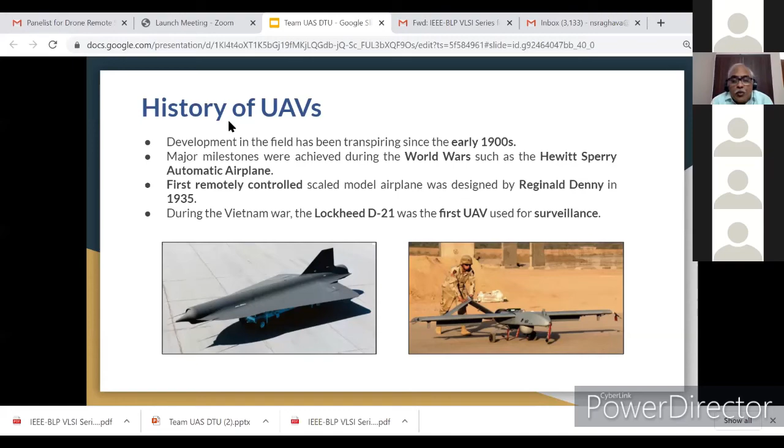Now, when I come to the overview, you know that the history of UAV field development in this field has been transpiring from the early 1900s, and major milestones were achieved during the World War, such as the Hewitt Sperry automatic aeroplane, and the first remotely controlled scaled model aeroplane was designed by Reginald Denny in 1935, and after that, in the Vietnam War, Lockheed started the D-21 with its first UAV for surveillance.

This is the evolution and revolution of the commercial or military and humanitarian use of drones. Initially, the drones were used only for military origins, and after that they were developed for humanitarian uses, which has been converted into commercial usage. So it shows the timeline of all the drones, how it has been evolved as well as revolutionized for different works.

Types of drones started with a single rotor, much like helicopters, with a large rotor along with a small one at its tail. This has been used as a single motor, and it is more efficient as compared to the multi-rotors.

Similarly, bicopters have been used as the second choice. They have two rotors, two motors and propellers, which are very cheap and offer a longer endurance. Flight control is complicated, but current results are largely experimental.

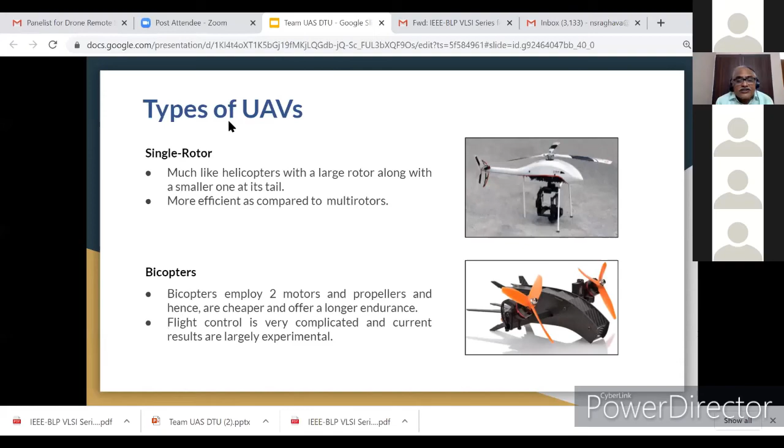The third one was tricopters. This is cheaper than the quadcopter, and has better endurance, but stability is reduced and the flight is jittery. So this jitteriness affects the stability of the film or video you are going to take, which is not that good.

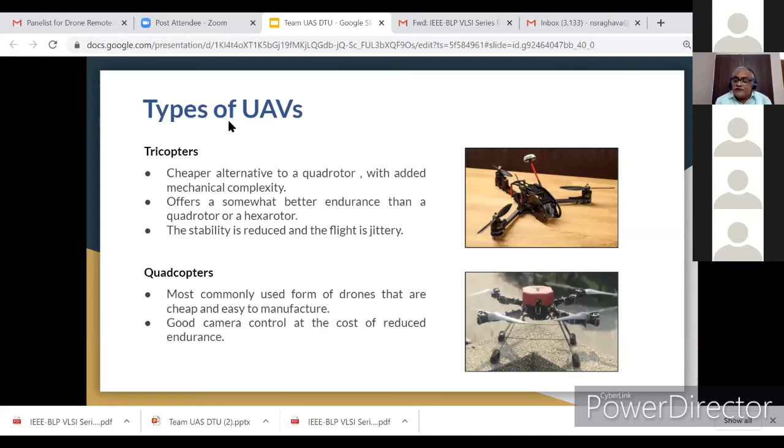Then they developed what is known as quadcopters. In quadcopters, mostly they used forms of drones which are cheap and easy to manufacture. Good camera control at the cost of reduced endurance has been achieved in this type of quadcopter.

Then hexacopters have come, offering a more stable flight with backup motors in case of motor failure in an arm. They generally reach greater altitudes and maintain control over their flight in windy conditions.

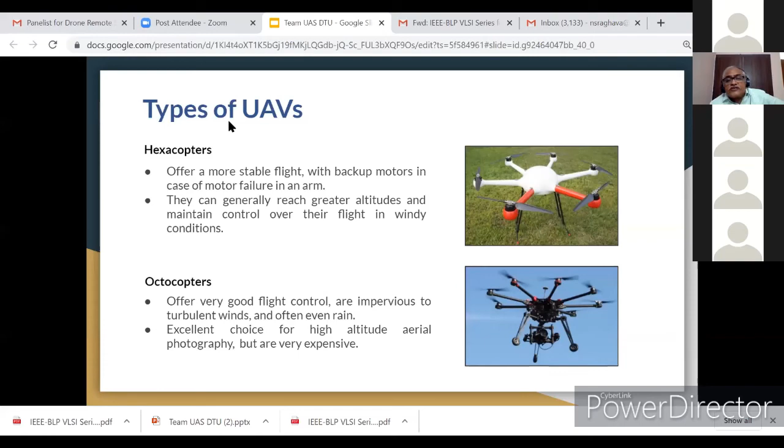Then came the octocopters with full good flight control, impervious to turbulent winds and often even rain. An excellent choice for high altitude aerial photography, but they are very expensive.

Then came the fixed wing. Fixed wings are just like conventional aeroplanes, having a wing structure, high speed and endurance, but they don't have hover capabilities and have low maneuverability.

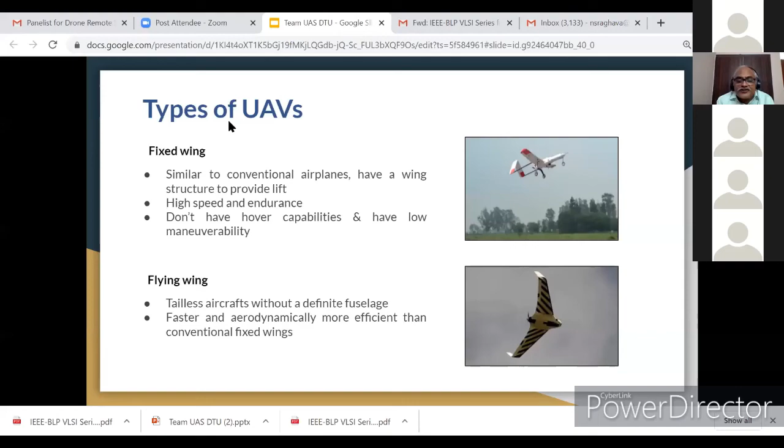Flying wings have also been developed. These are tailless aircraft without a definite fuselage, and are faster and aerodynamically more efficient than conventional fixed wings.

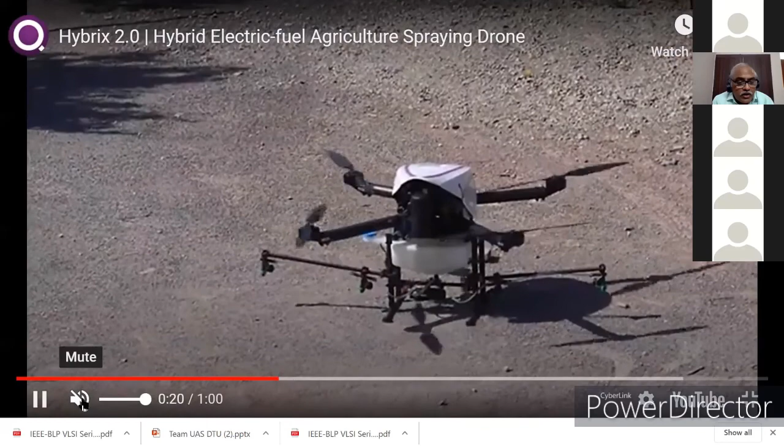In the video the volume is off. I'm not able to understand. Achha, okay, yes, is the sound there? No.

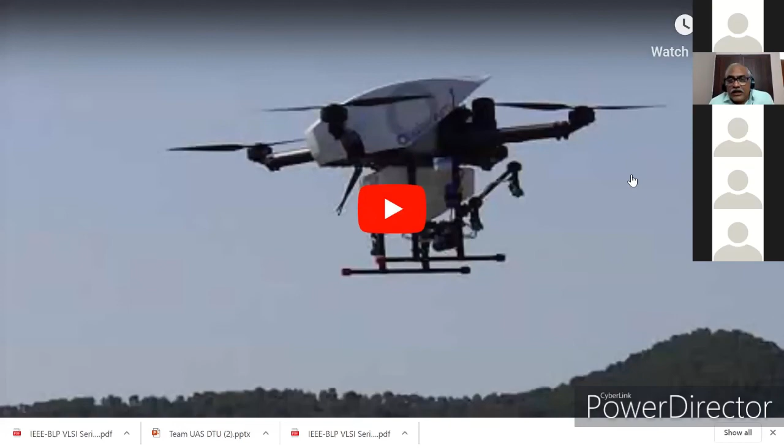So this shows how you can spray the pesticides on the crops. So this we can use it. I will show you certain things afterwards, which I have worked along with Dr. Sahu.

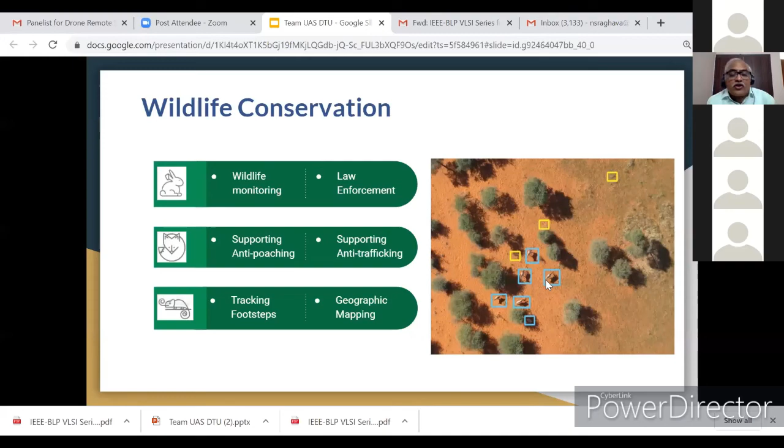And this is for wildlife conservation. We can identify the people where they are working and how they are working. Any other thing which you can identify about the concentration of the people and disaster management. We can identify the concentration of the people and drop the payload.

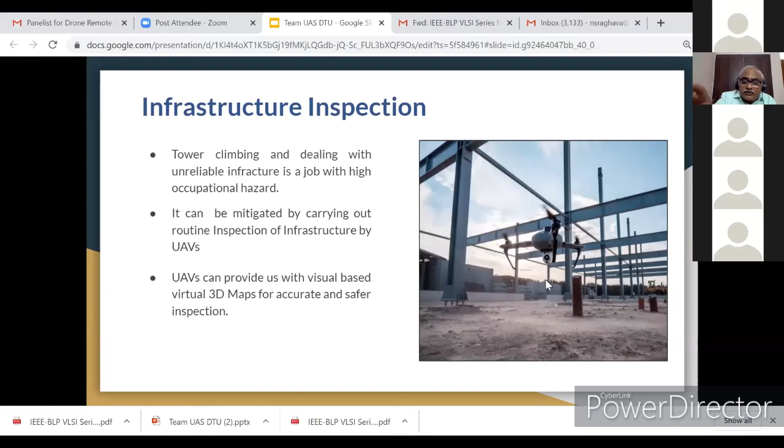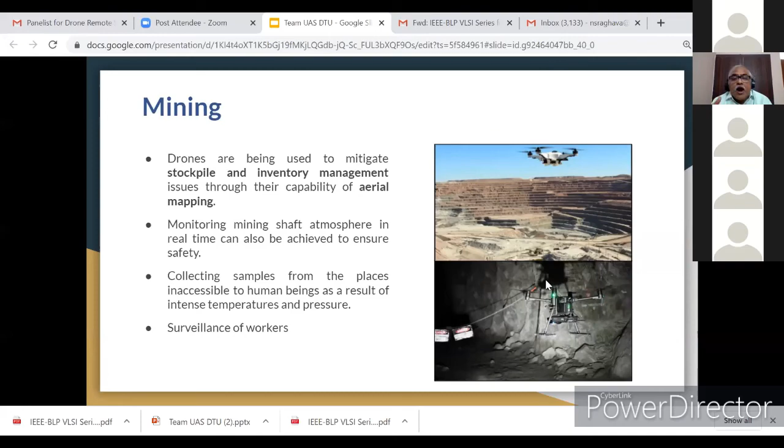And infrastructure inspection, while constructing, we can send drones like this, and we can see how exactly the situation of working can be identified. Like in mining also, you can send drones for stockpile and inventory management or aerial mapping capability and the working condition of the workers. All these things can be identified for use in mining.

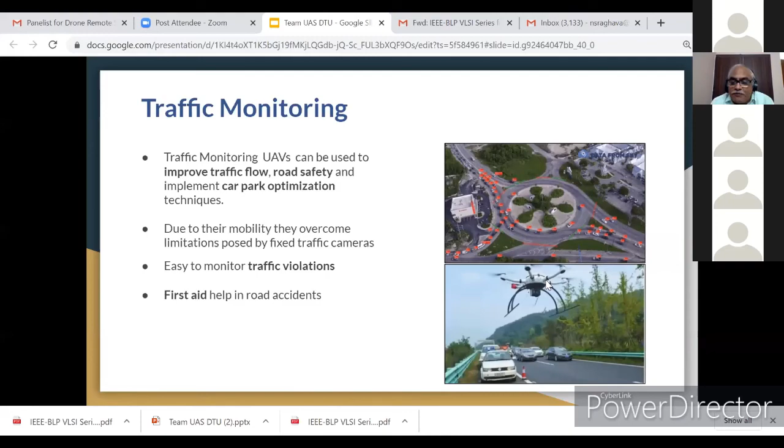This is traffic monitoring, how the movement of traffic is there, whether they are violating traffic rules, or first aid help can be made, etc. And this is signal strength mapping.

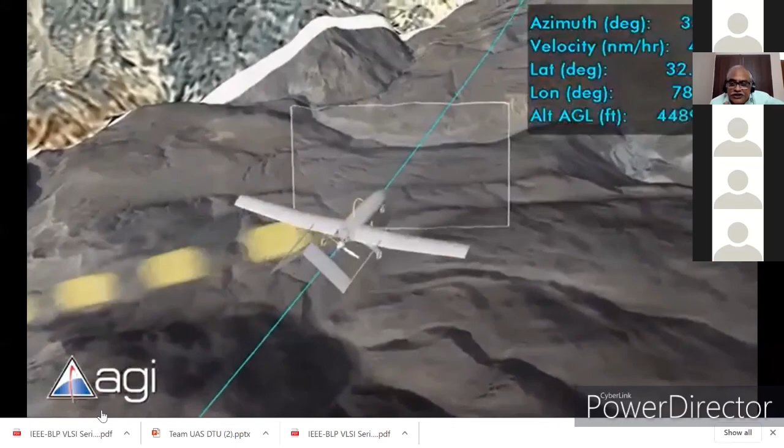This is one of the videos in which animation has been done. Initially, my students have identified how to do it, and the structural analysis has been done, and then whether this structure will be used for one particular thing or not, and how much altitude and velocity it should be, and how the turns should be taken. Everything they have done using AGI.

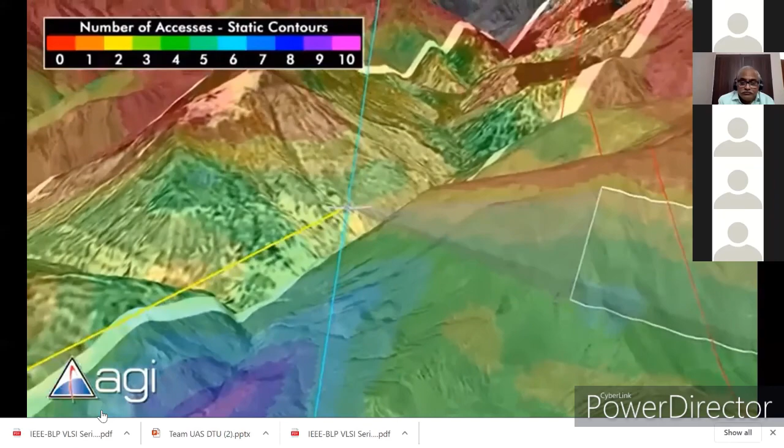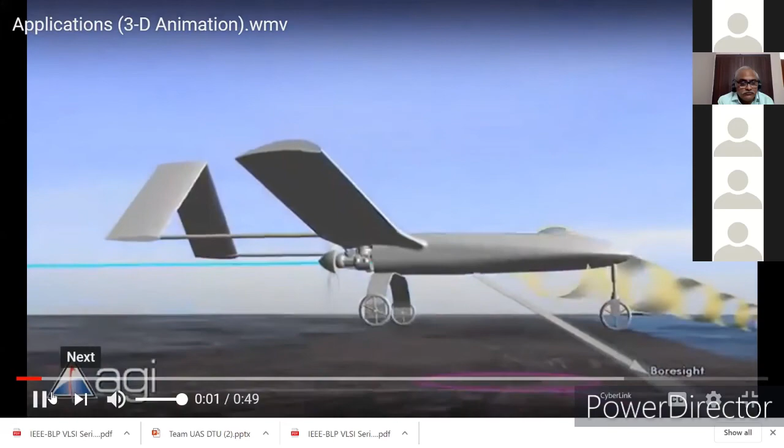So for this also you can use how to find the signal to noise ratio and a heat map of signal strength from various cellular devices in real time. All these things can be done using the drones.

And for defense systems, there are many operations which can be done using different drones, and it has been shown here.

And who can use UAVs? I think so many people can use UAVs. Everybody knows this one, so I'm not going to go in depth for this.

Technologically and manufacturability. See, manufacturing of UAVs, mostly in India they are not doing. They are importing the structure from outside, and then they are working on the electronics part of it. Most of the people are doing like this.

So with this concept, Lockheed Martin people have come and approached many universities in India, and they could identify us because they have seen us working sincerely for one of the competitions held in Maryland. In that, they have identified ourselves, and they came and approached us and asked us to do a project for them. They have given the specifications.

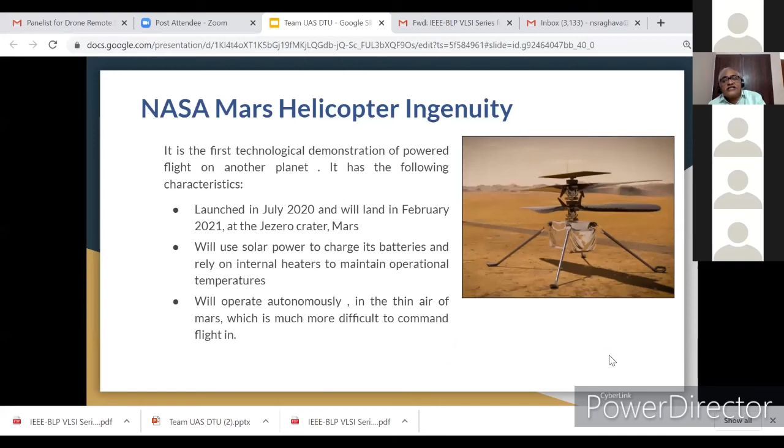Regarding recent developments and breakthroughs, NASA has sent the Mars helicopter Ingenuity to Mars to gather information. In July 2020, they launched an aircraft called Jezero crater to Mars, which will reach Mars in February 2021. Draganfly vital intelligence is being used for COVID-related monitoring, trying to get information on breathing rate, heart rate, and temperature.

Now I will tell you how our university has introduced drone technology and what we are working on. We are a research team comprising undergraduate students of DTU, and with the help of faculty, the students develop, fabricate, and do research on drones. We adopt evolving technologies to design, develop, and implement cost-effective solutions in the field of UAVs.

Why do we do it? Because it has very high potential, and we can tap untapped capabilities of UAVs and use them in society. This is the team structure we have, working with different students at different levels.

These are the departments we have. We have the airframe department, where design, fabrication, study of propulsion systems, payload drop, and support systems are done. Avionics handles system integration, algorithm development, communication systems, embedded systems, and power systems. The software team does computer vision, code optimization, software stack, deep learning, and artificial intelligence.

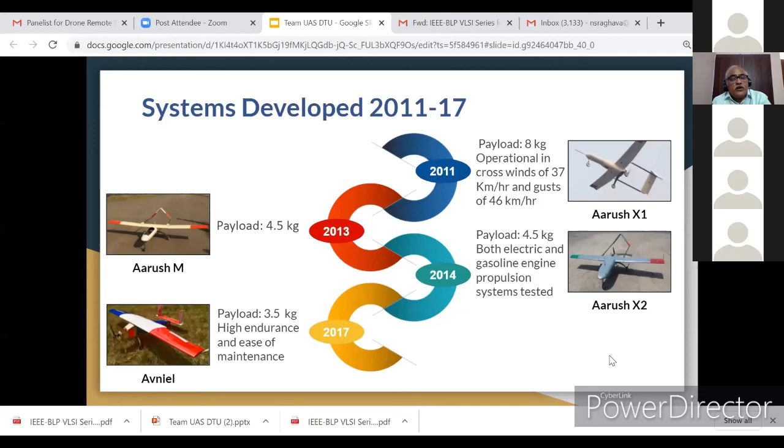Similarly, Aarush X2, the second version, has been developed with this payload, and Aarush third version, and another one called Avniel, developed in 2017. You can see this video.

You're not able to see the video. Yeah, now it's working.

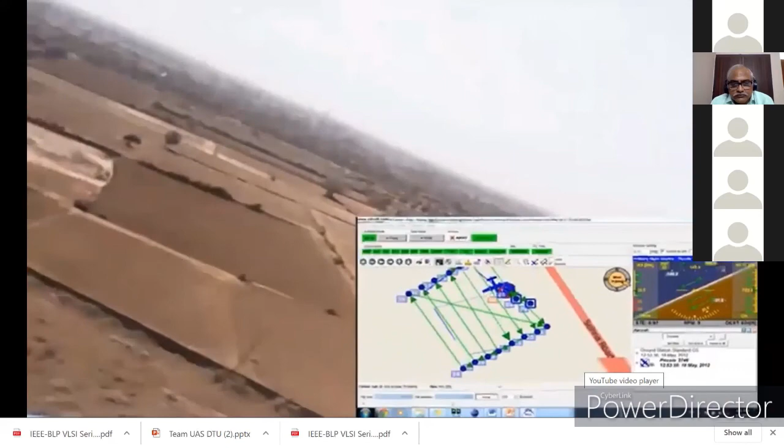Since there is no audio, can you explain them? I don't know why the audio is not coming. No, you can explain the video you are showing. Okay, I'll just start from a little bit.

This is in Karnal. We have... one second.

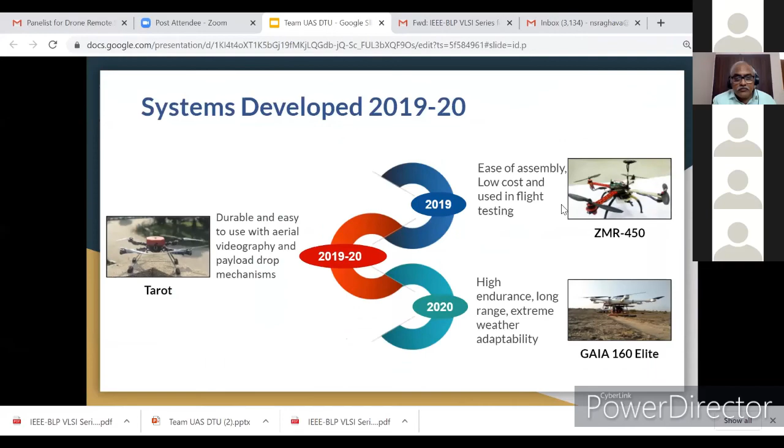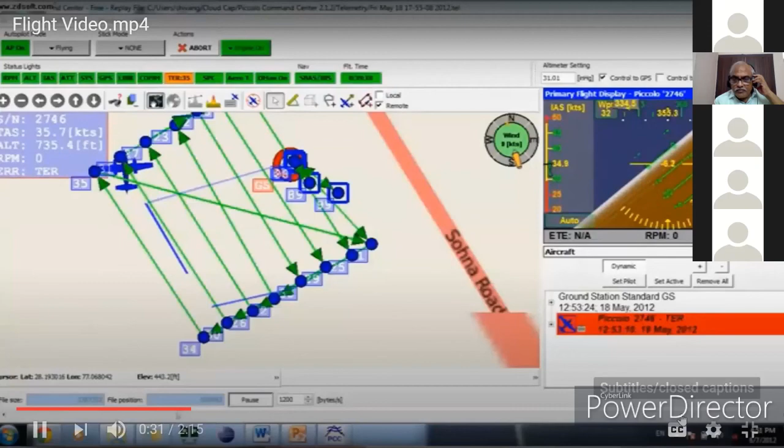Are you able to hear the voice now? Yeah, better. Here in Karnal, we have used this...

Aarush X1. We have shown these waypoints which we have already entered into the system. Based on this, the flight is taken from all directions, and all the information is processed on board and sent to the ground station as well.

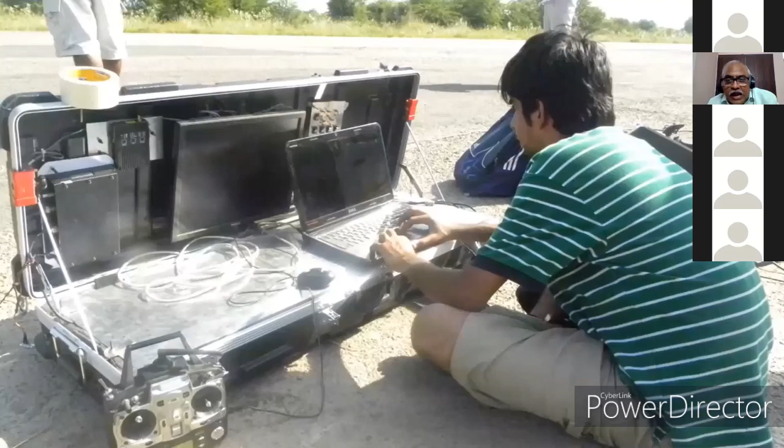Here you can see there is a computer at the ground station. All the information can be seen here. This is the ground station we developed, and these are my students working on the ground station, processing the information at the same time.

He is the operator who monitors the landing and takeoff. So these are the other systems which we have used.

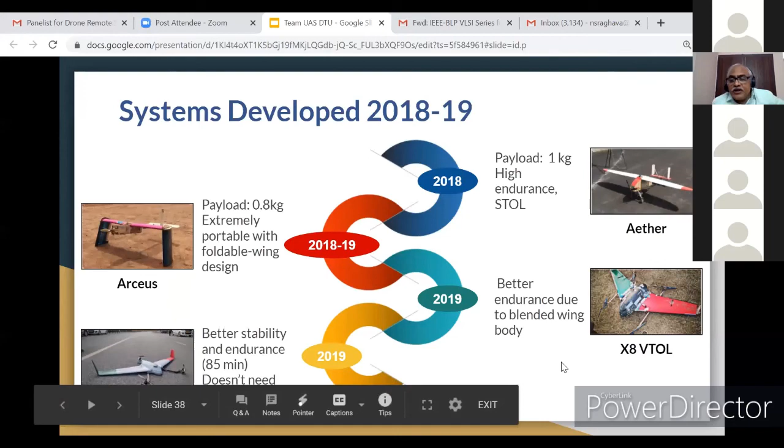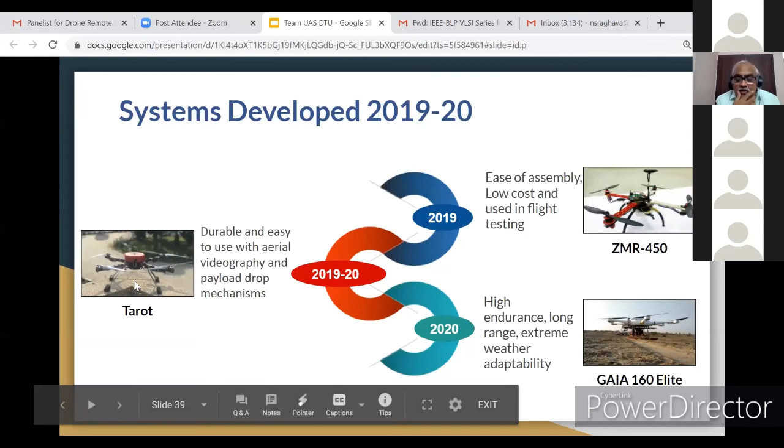Our capability shows how the prototype development is done. This is the manufacturing concept of fabrication.

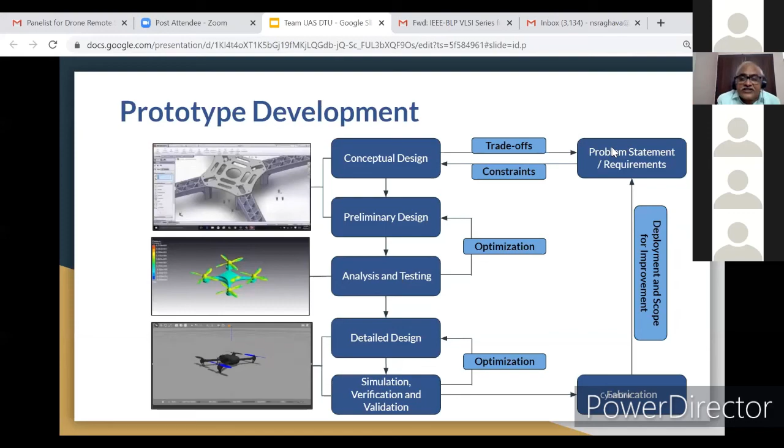Once everything is over, the simulation with verification and validation is done, then we go for fabrication. Once it is fabricated, we test it in our university to see whether it is working properly or not.

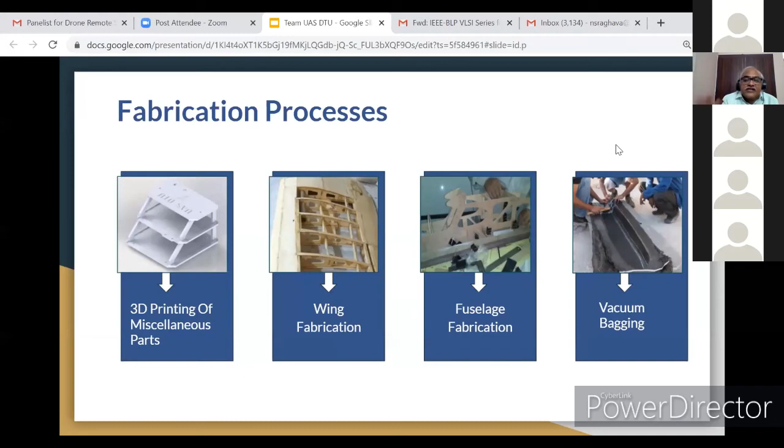The process of fabrication includes 3D printing for developing the products. Wing fabrication is also done using molds, fuselage fabrication as well as vacuum bagging and other things we do at our university level itself.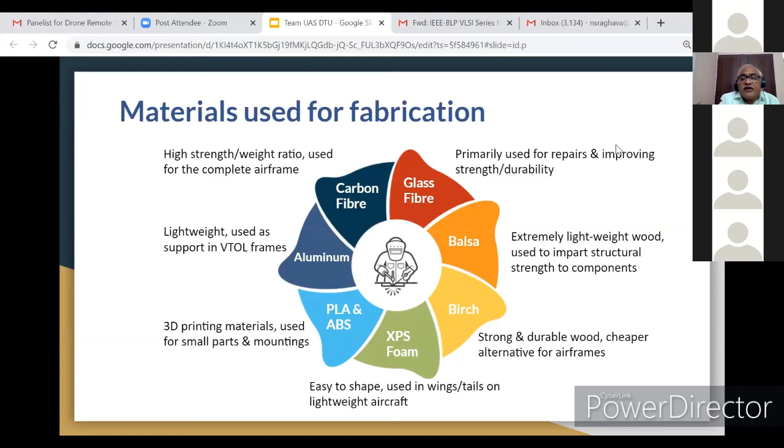All these materials we have utilized, developing with each one to see how each will be used. We have used balsa and glass fiber as well, and developed different types of UAVs. This is one more video which shows it.

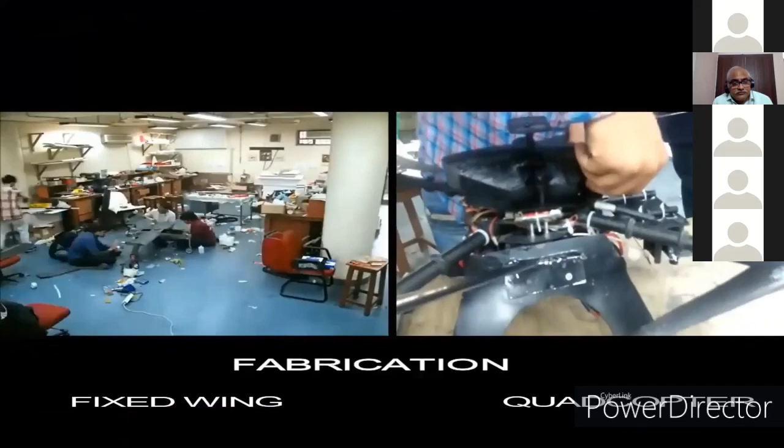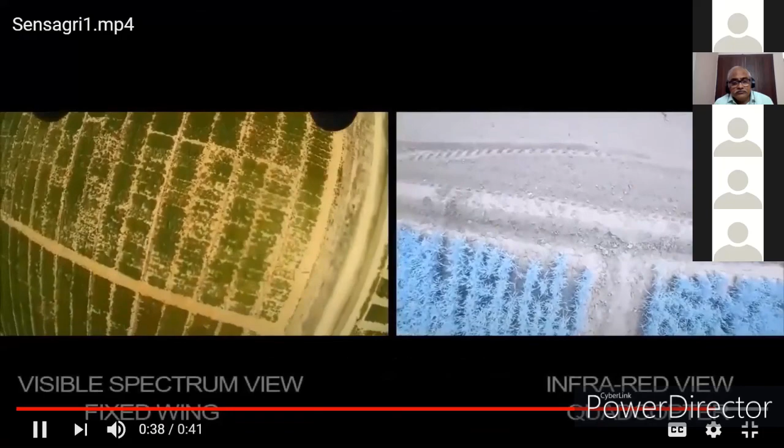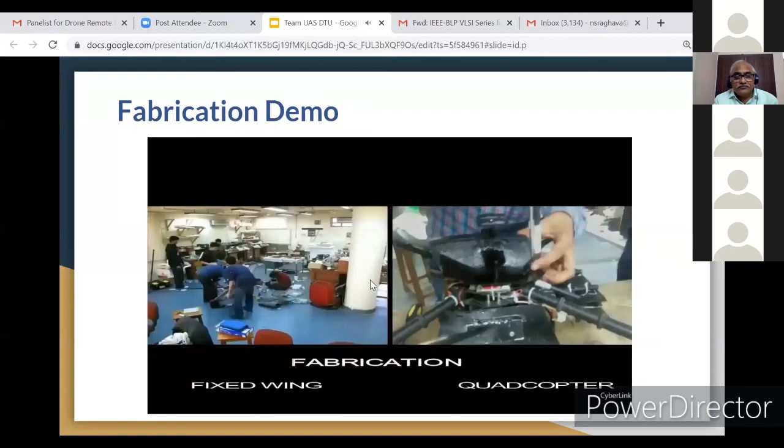This is the place where we have worked with Sahu sir, and we have deployed some different UAVs like this, and developed different structures.

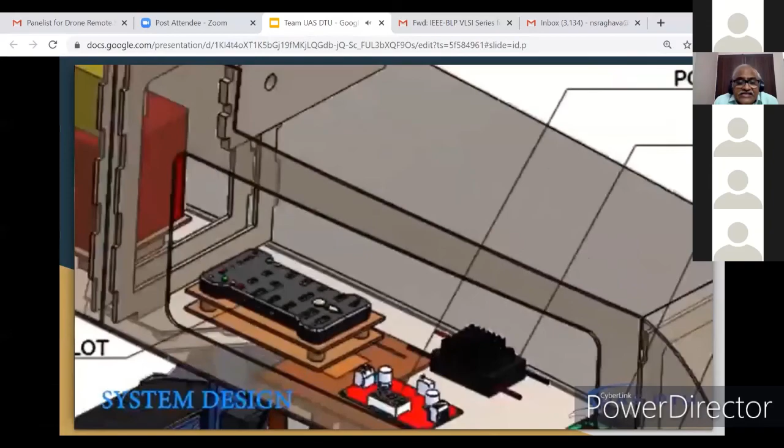We have done the design analysis, stability control, and system design for these UAVs.

This is the place where Sahu's work is done.

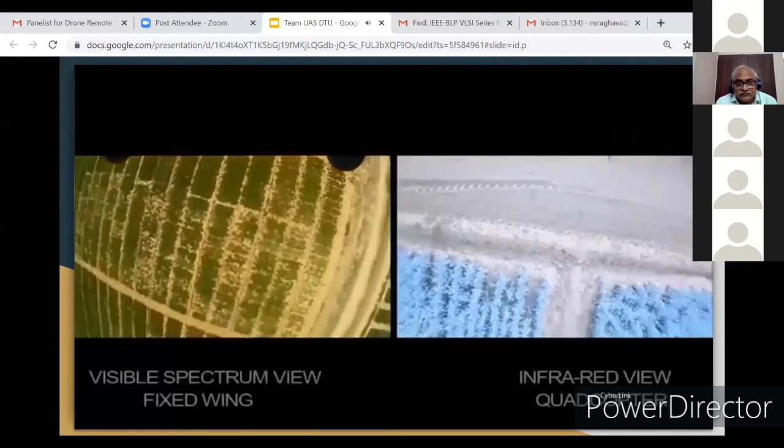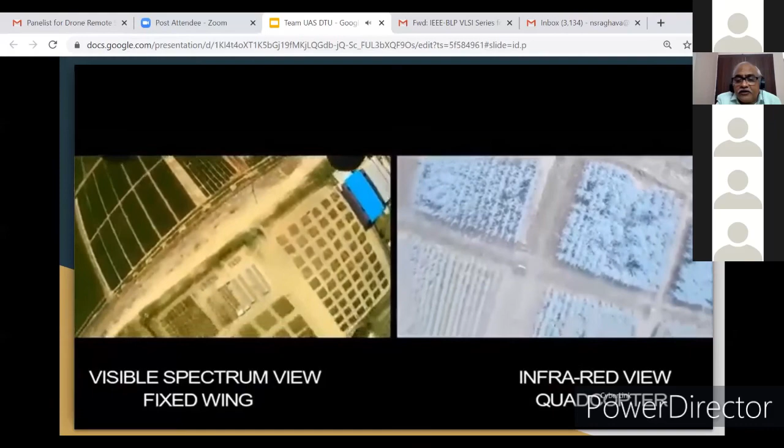The right one shows the infrared view of the quadcopter, and this is the fixed wing view of the video which has been taken with the hand launch.

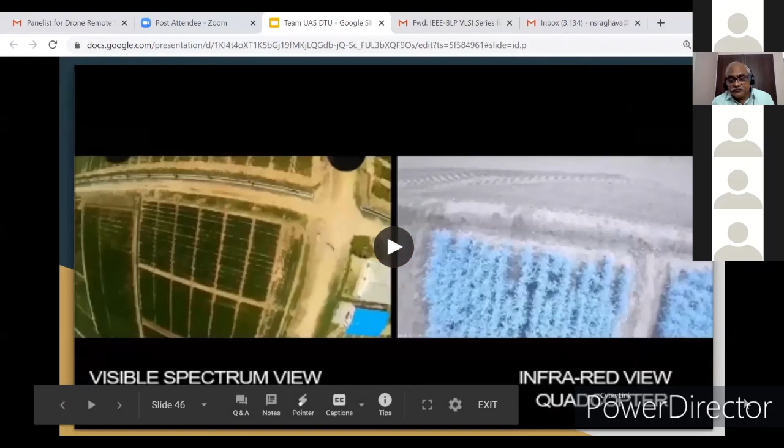Communication systems also we have used. RF based true ad hoc mesh solution we have developed. UAVs with ground control station communication range over 50 kilometers.

This also we have developed - scalability of swarms up to 50 UAVs. We have been able to achieve nearly 35 UAVs.

Right now my students are working in Pokhran to develop another 15 UAVs, and they are working on this. We will be showing these 50 UAVs to Indian Air Force people from September 19 to 23rd. We have a competition with Mehar Baba, which I will be telling you in due course.

And Wi-Fi based cheapest ad hoc mesh solution scaled up to 12 nodes we could also develop.

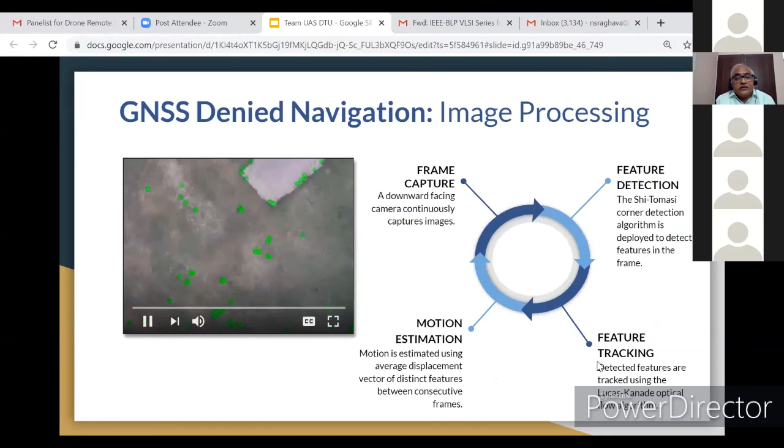This is one of the videos which shows it.

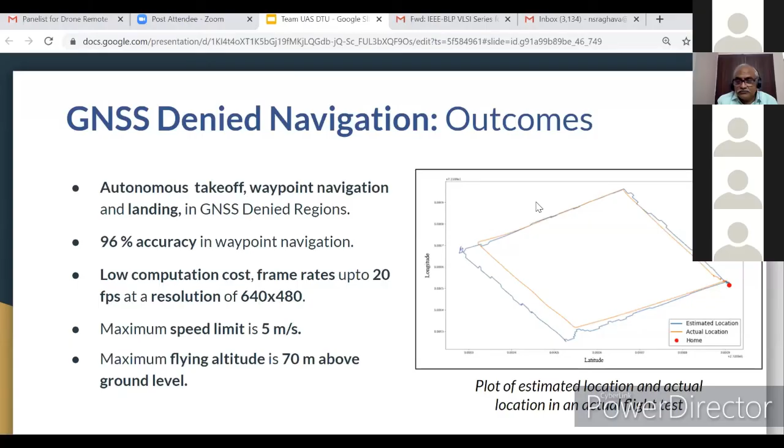So these are the outcomes for GNSS denied navigation.

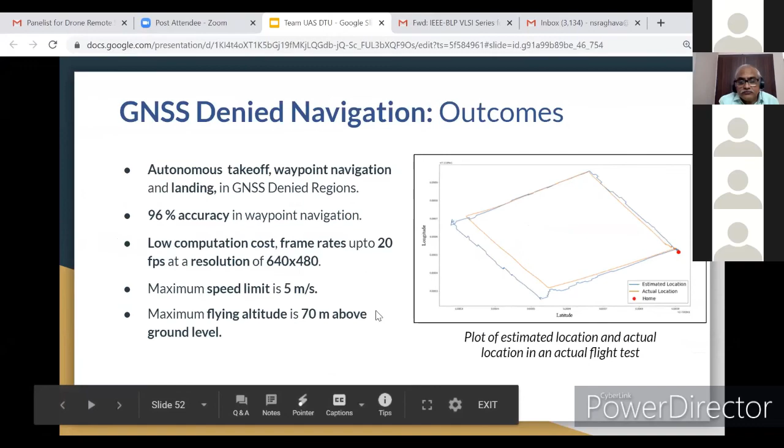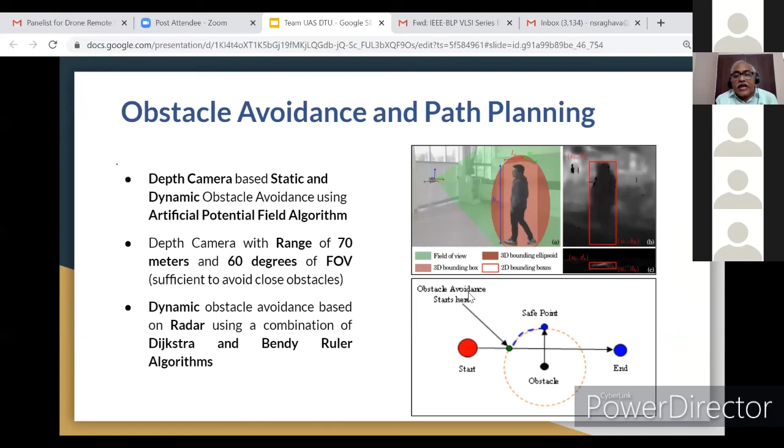I think these things will be done by Madam Shafali, because she is going to explain completely how human detection or the image processing techniques are being used, and how obstacle avoidance and path planning can also be done using image processing.

We have developed an antenna also using HFSS, and we try to use this particular antenna to communicate wirelessly, so that the UAV will communicate directly the information to the ground station. This is an antenna tracking system which tries to give maximum information to us without any problem.

The direction of the swarm is taken into consideration, and the complete swarm of UAVs will move in one direction without colliding.

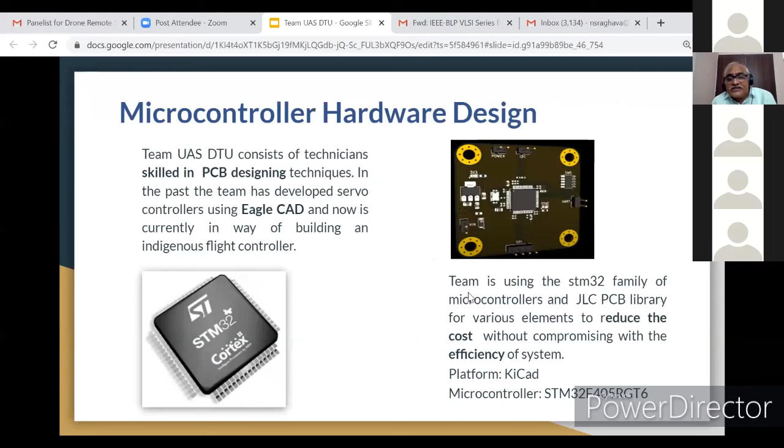And the projects, if you see, this is the achievements of the students which they have got.

So nearly 10 years, each group, how we frame the group is: first years when they come, we will have interviews and other things, rigorous interviews with written tests and interviews. After scanning all of them, we will select only 20 students, and those 20 students will be trained for all the work from first year, second year, third year, and fourth year.

The fourth years will be working as project managers. The third years will be working actually on the system, and the second years will be supporting the first years, and first years will support the third years, and they have heads who will be trying to control these people. Every weekend we will have interviews, discussions of the things, and at the end we will come to finalize the information.

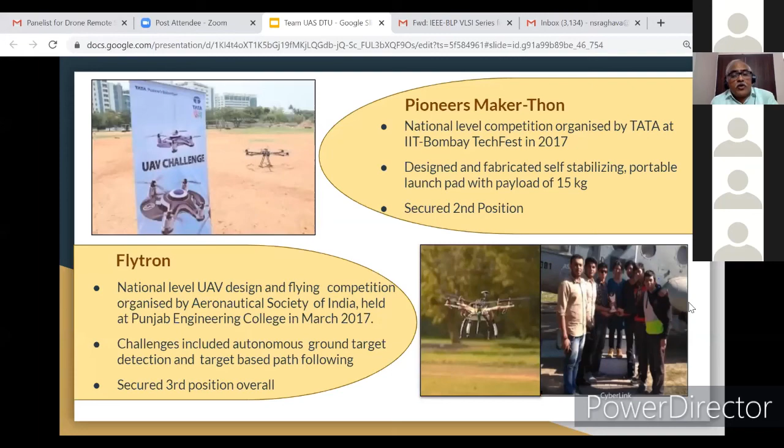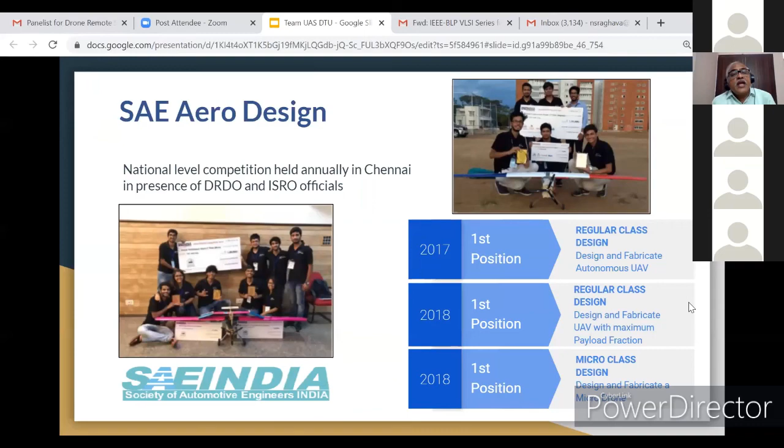So this is another place where we have gone for competitions, the SAE Aero Design. We always got first position for the past 2 years, and this is a competition we are going for from September 19. If we win, we will be getting nearly a 100 crore project, which I wish my students will surely try to do.